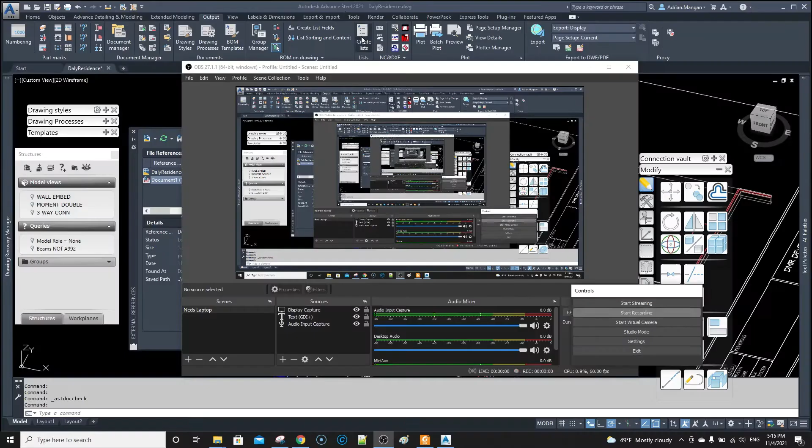So basically, this is a small model, and we're going to send it in. Before we sent the approvals in, they came back and have a couple of changes. So they don't want to regard it as a revision because it has not been submitted yet.

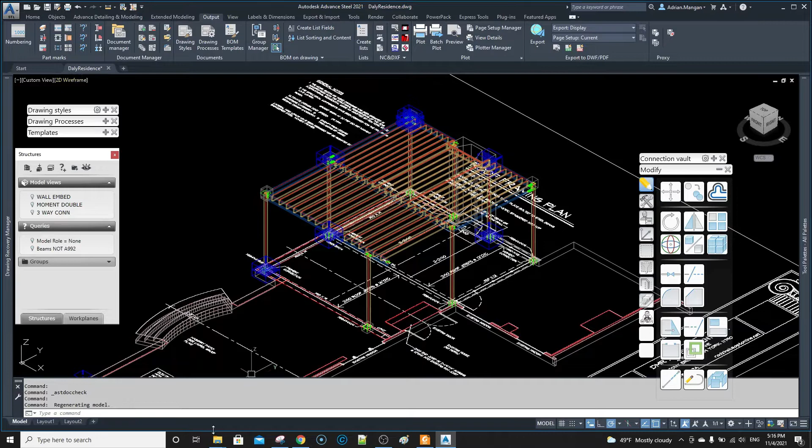But if you want, what I would do is come into the folder for the job, go into the details, select the three details and copy them, and then just do a new folder.

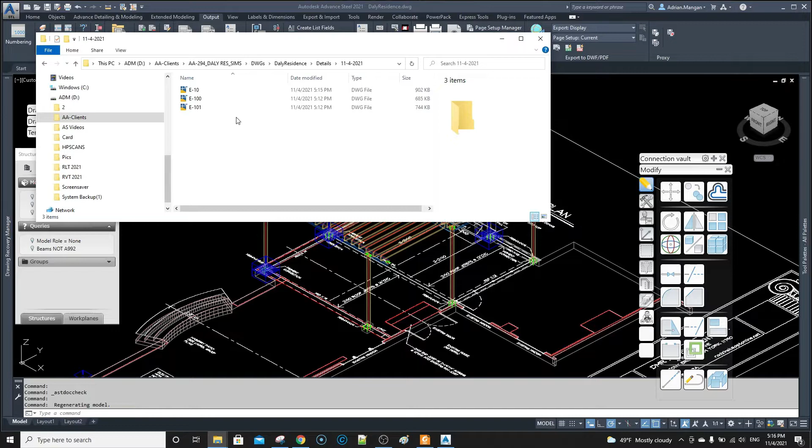Now if you're doing a revision, this will be different. So I'll do it both ways. I'll copy this in here, paste, okay. So now those are copied before I change them.

Now also you can go into the document manager. You need to make sure they're all up to date before you do the revision. You can see these three are all up to date, so select them all and...

Go to revision. Now I don't want to do this, but I'll just do it for this example. I'll just put column sizes.

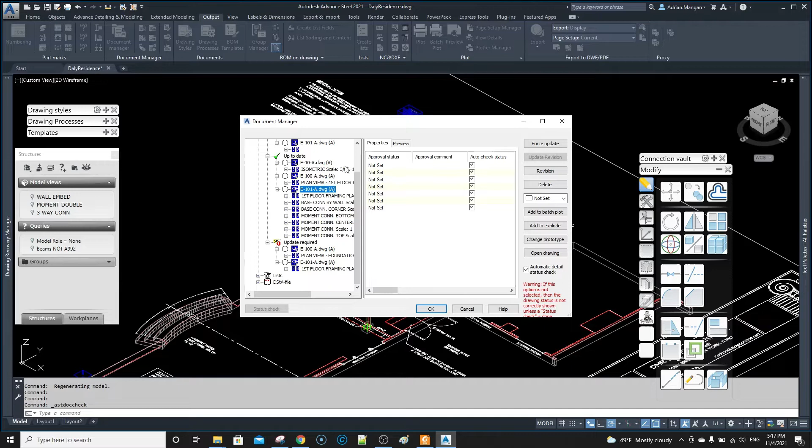One of the moments has to be moved. Okay. So it's adding a revision to these. So let's just do okay. Let's turn off the PDF.

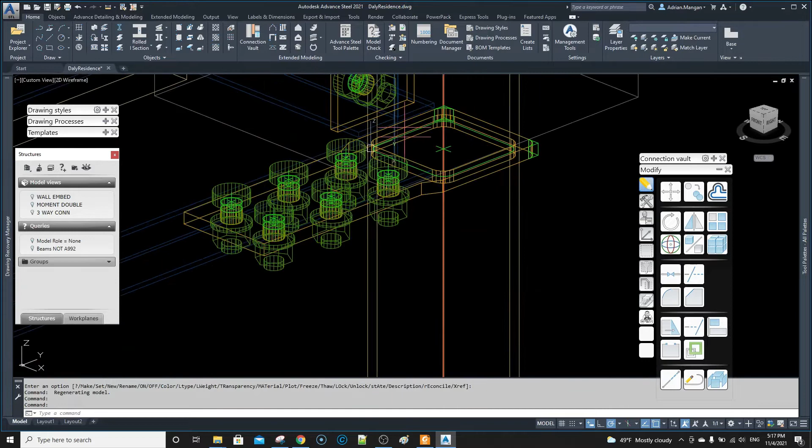So we have a couple of small changes here. For one, we want to rotate this moment connection heading towards this chimney over here. So you can select the bolts and the plates - that's all it is, the bolts and the plate - and we can rotate that.

So let's come in here and go to rotate. Select the rotate point on the center of the column, and we want to rotate that minus 90 degrees, I believe. So just check it first. Now we want to delete source objects, preview, and that's what we want.

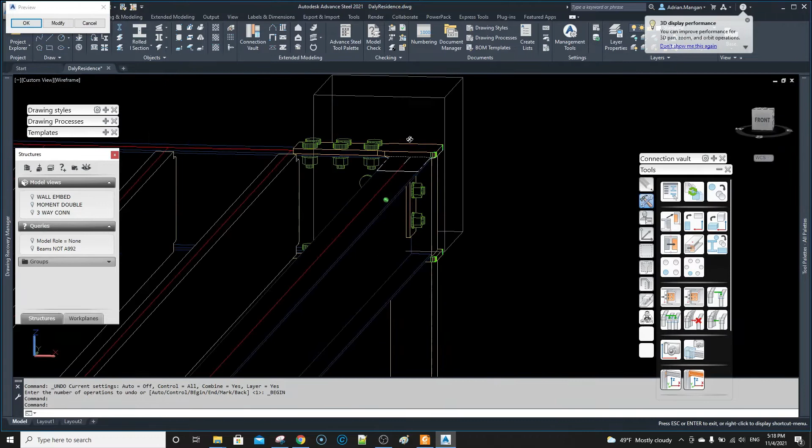Now we can see the bolts seem to be working. Just go back to modify, include additional connections, preview. Okay, there it is again. So now you can see the weld has moved also.

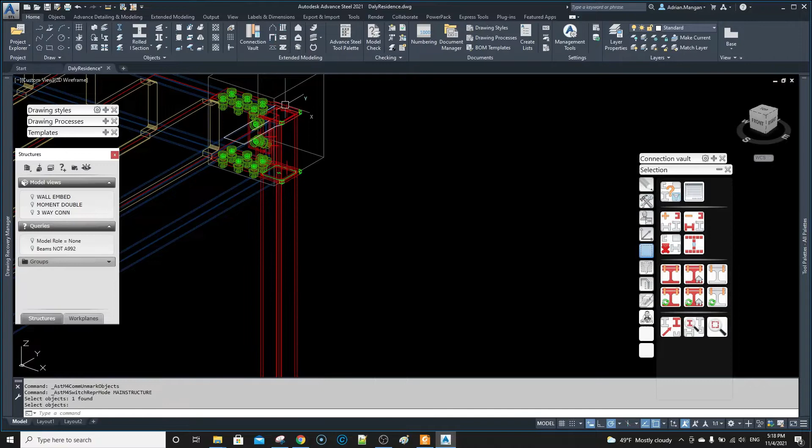So let's just check to see that it saved our welds. Alright, so everything is fine there. So that's one of the changes made.

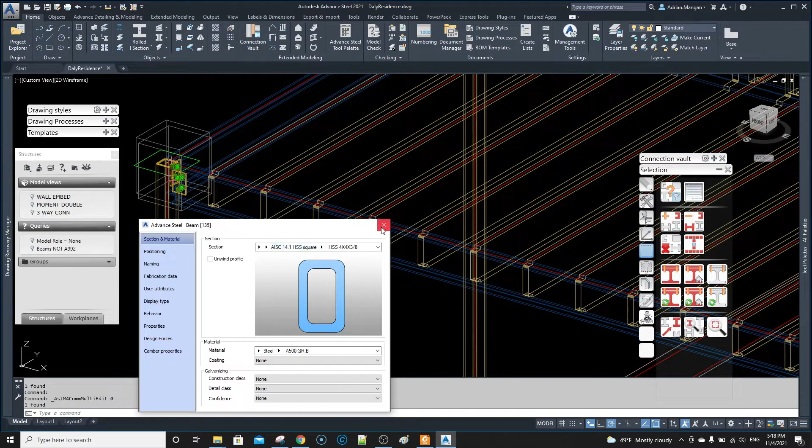Now the other change is this column here is going to change to a 5 by 5 by quarter inch. This one here is going to change to 4 by 4 by 3/8, which doesn't really affect us at all because it's just making the column thicker towards the inside.

So now we'll come over here and let's turn off the cameras so we can't see that camera in our way. Now we could create a model view here if we wanted to. That would probably make this a little easier, so why don't we create a quick model view, right?

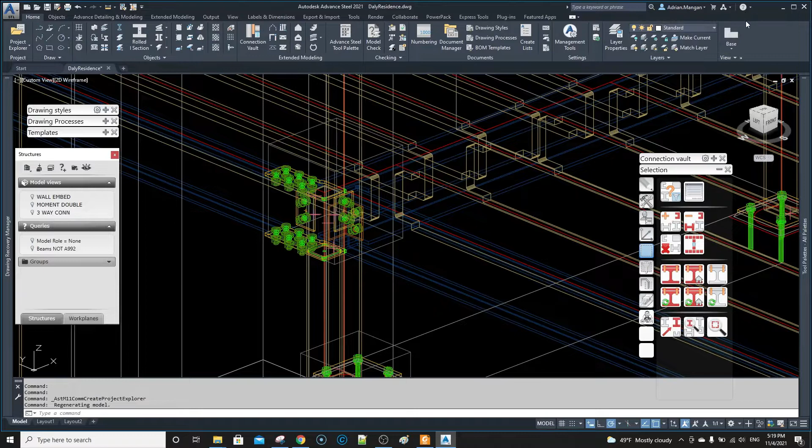So let's go in here, three-way. Actually, I have created these model views already. If I come in here and just put them on - I forgot, I put them on the cladding layer just so I can turn them off.

So let's click on this. So what we're going to want to do here is change this to a 5 by 5 column. You can see the plate is a 1/2 inch either side.

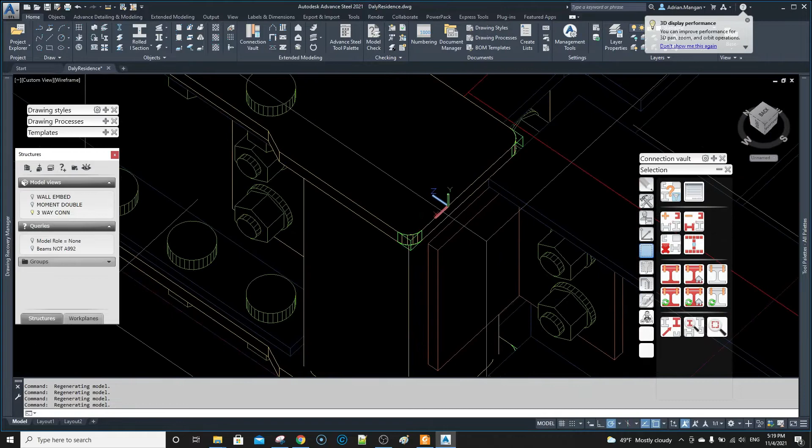So when I change this to 5 by 5 by quarter, okay, so that's good, but now I can see it's flush there.

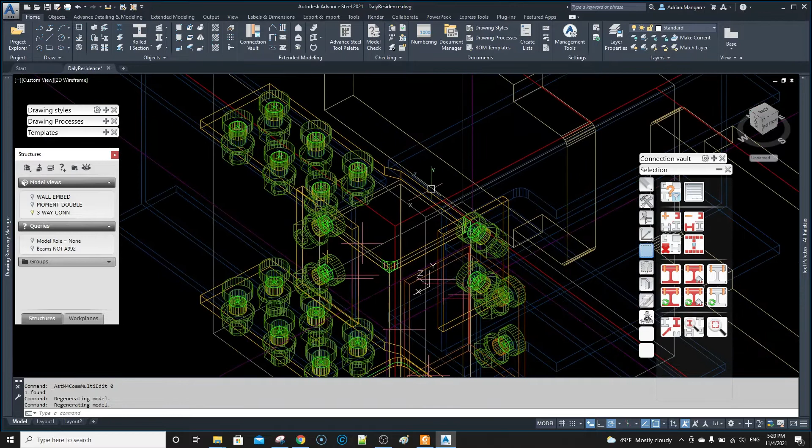So what I'm going to do is stretch this plate rather than redrawing it. So what I can do is let's make this box a little smaller. Sorry, you can only drag less than halfway. All right, you know what?

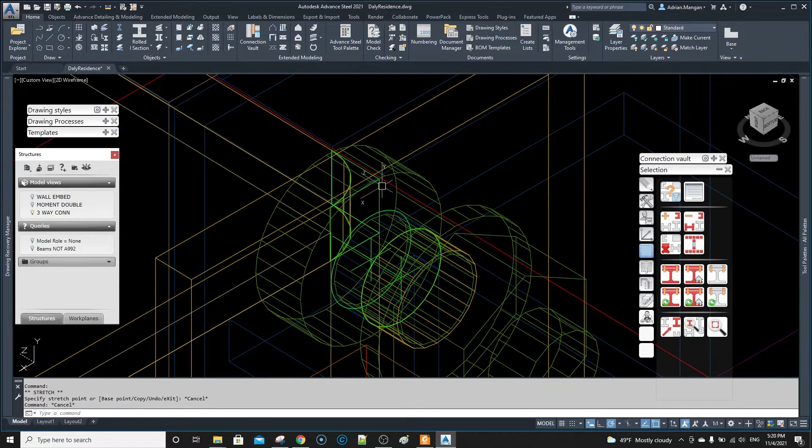That's fine. So now we're going to drag each way a quarter inch, or a half inch. But see, because we have a radius on the corner, it's messing it up on us. So just delete those radiuses. Okay, delete those, and now we're going to drag it - we're going to do a bit of dragging.

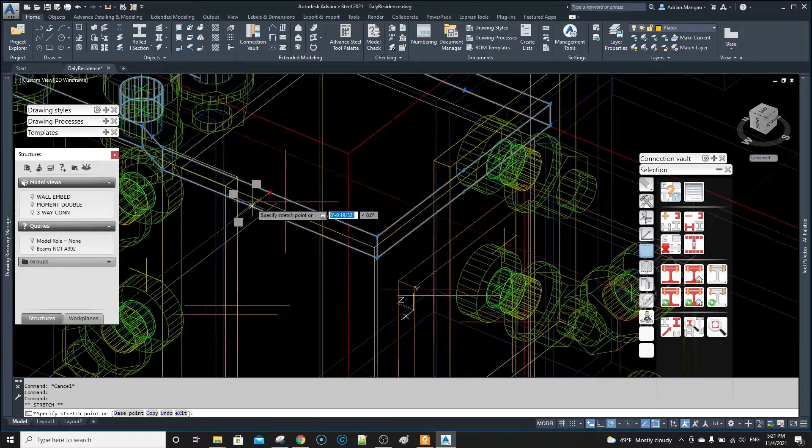So what we can do is do it for both of them, or copy it down. So let's decide. I'm going to go 0.5 that way, 0.5 this way, and 0.5 this way. So I have 0.5 inch over either side.

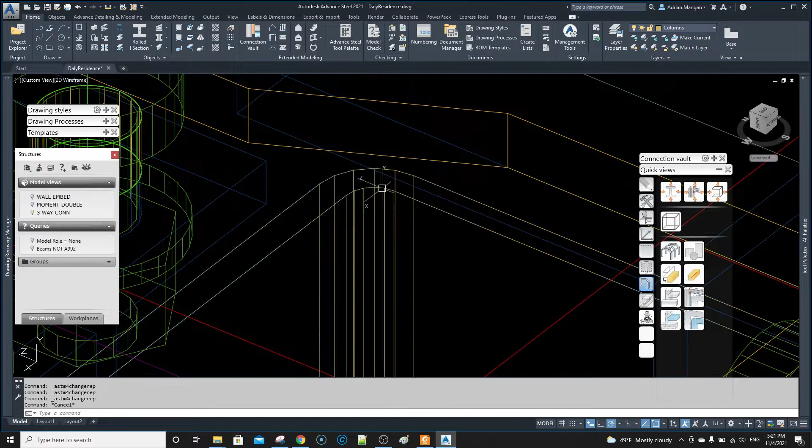You can see now this is close to this corner, but this is going to be rounded when it's viewed properly. So if we go and look at this, you can see we still have enough room for a weld there, but just to make it a little better, I'll go 0.5 back this way, and I'll also do the same over here.

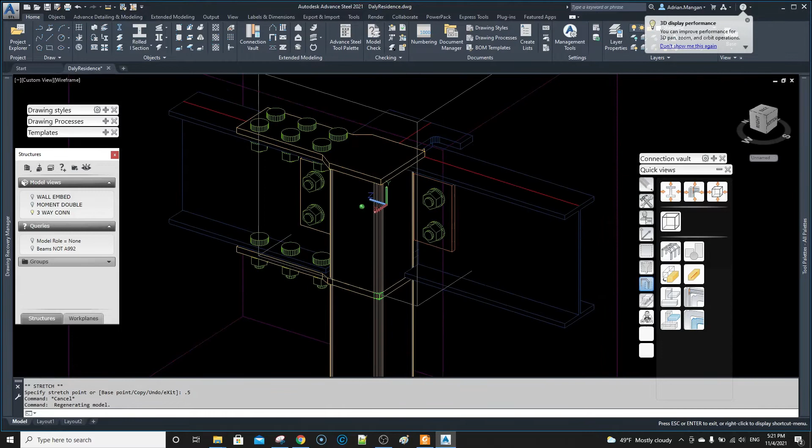Alright, so is that good? That looks good, right? So what I'll do is the same down here. We're going to delete these corners. We can delete this because this is off the old column, and we're going to do the same thing.

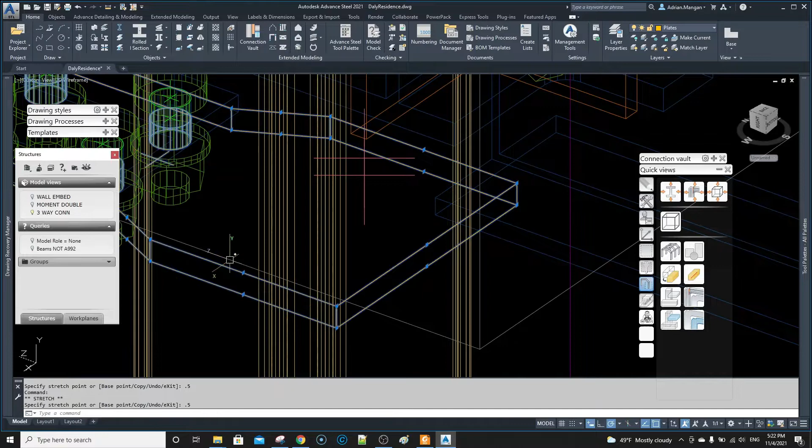So we're going to go 0.5, 0.5, 0.5, and then don't forget to stretch your corners out. 0.5 and 0.5. It seems a little monotonous, but it also means you don't have to redraw the plate, because it doesn't really matter the size. They're just going to cut it on the plasma anyway.

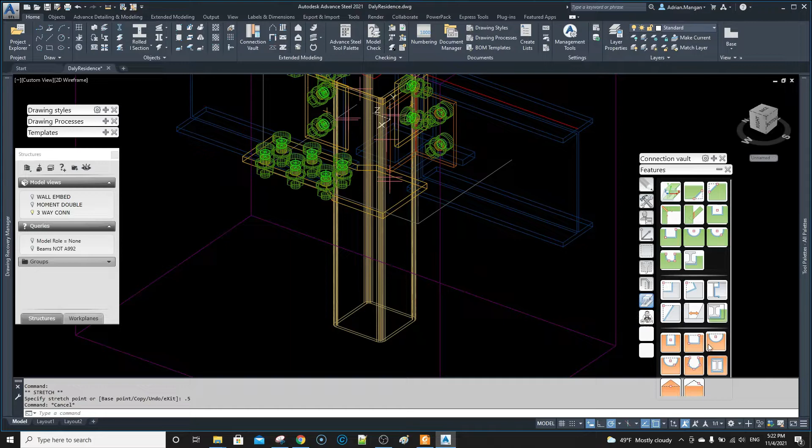So we're going to use this feature down here, and then select the plate. Now we're going to select the column, and we're going to add a 1/16 around so they don't have any issues fitting the plate. So there you go, there's your plate.

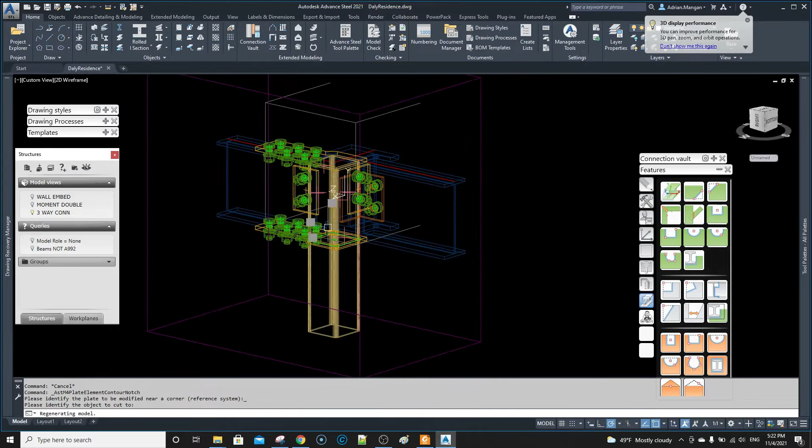All right, so because we haven't added any entities, we should have no issues with our 3D model the way I'd like to do it. So I'm going to move this over. This has got to go a half inch, but just to make sure, we'll move it in the Z direction to the face of this column. You can see that's how that's connected there. It's a little bit of a weird connection here, but it's fine.

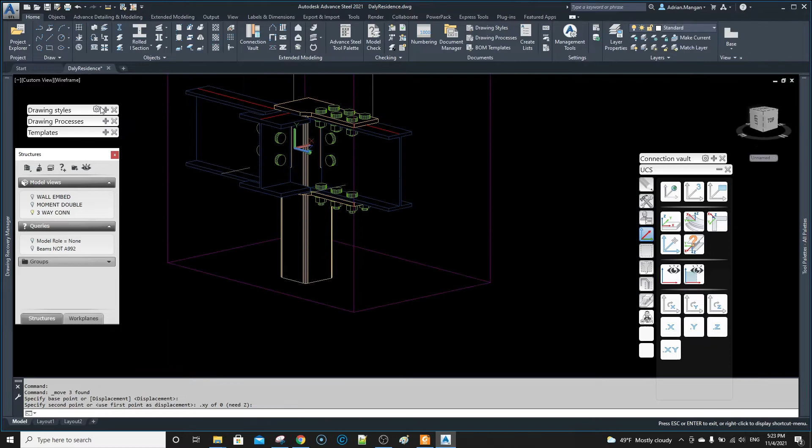All right, so now we have updated our model. Now we're going to go to Output, Document Manager. You can see I don't know why it's saying this is up to date, because this one is not up to date—I certainly have changed some stuff, but sometimes it shows up as up to date and update required. So let's open all these.

I don't like to just update them all at once. I mean, you certainly could. I like to go in and update them one at a time so I can see the changes as they're happening. Everybody's different—it probably takes me longer, I'm sure, to do it this way.

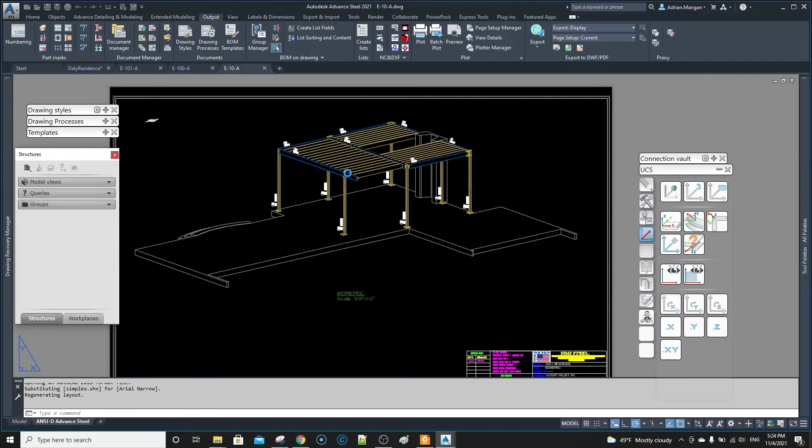So let's have a quick look. We can see this column here. You can see I have an unresolved issue here, which I need to purge from this document. You can see this is 4x4 by quarter, 4x4 by quarter. This I changed up a size, and this one got a little thicker, and this moment connection rotated.

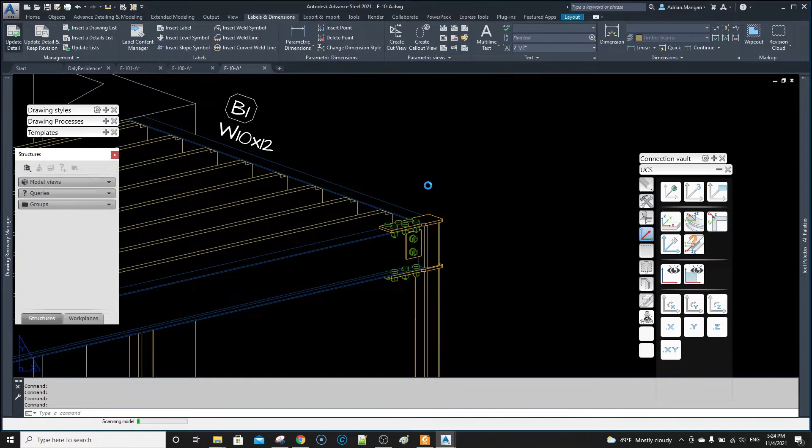So what we're going to do is select this, labels and dimension, update detail, and we'll see this flip across here. Now, if I had drawn a new one and deleted this one, this wouldn't have turned around—it would have just deleted this one, and the other one would not have shown up because of the way I created it.

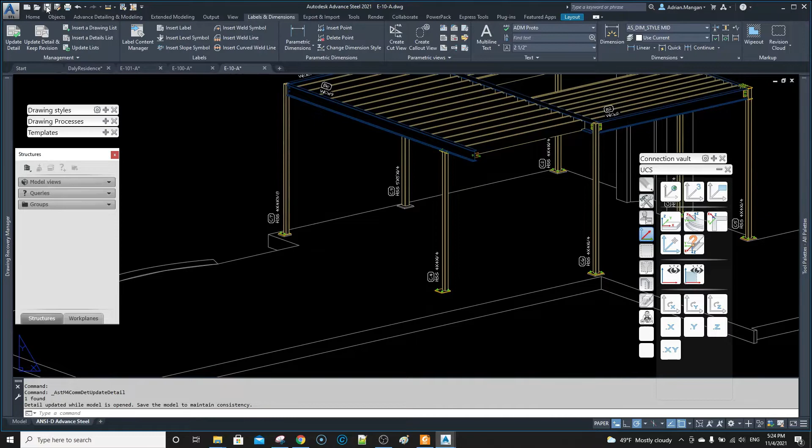We'll come over here. We can see this is a 5x5 by quarter, and this is a 4x4 by 3/8. So that's good. So if I go back to the model and go to Document Manager, let's have a look and see what's up to date. We can see this is now up to date—no update required, so that's good.

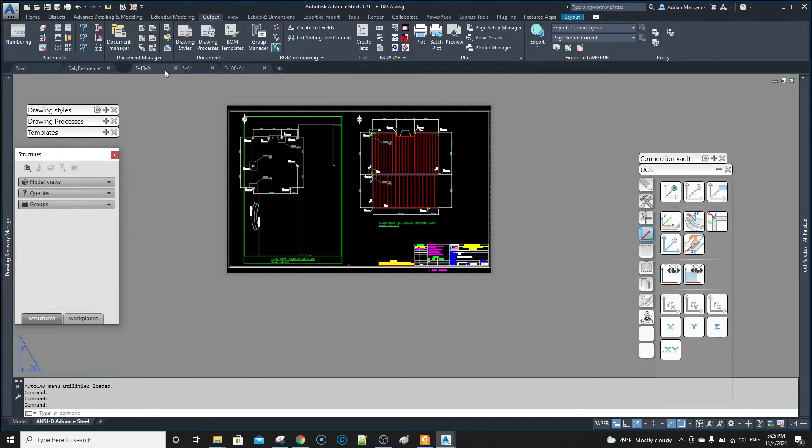So now we're going to go to the next one, which is the plan views. Let's see, we're going to go here and select this, update detail. All right, and we can see that this one has changed to 5 by 5 by quarter, and this is 4 by 4 by 3/8, so that's updated.

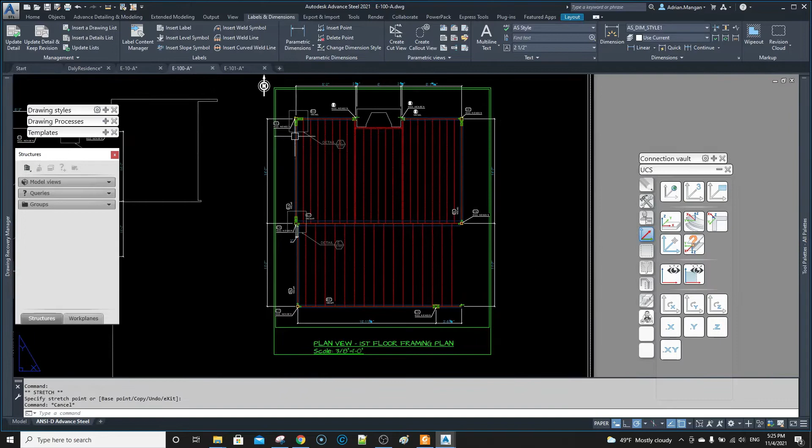And we're going to come over here and we'll watch this one update. We can see over here the column sizes are still incorrect. So when I go now, you can update these with revisions and it will cloud these for you. So I guess I could do it, but I don't want to because I'll just have to remove the clouds anyway.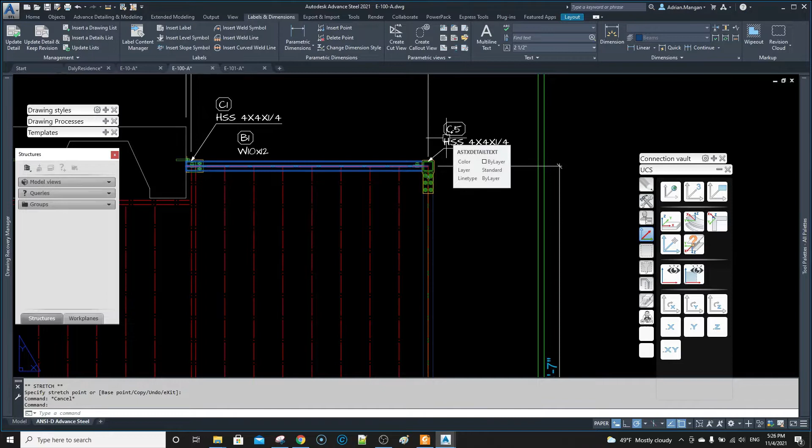I guess we could do it, for example. Let's see—no, I'll just do it this way for now. If you go back into the document manager and update with revision, it'll mark all the parts that have changed. So you know what, we'll try it. I don't use it that often, to be honest, because they don't really require me to mark them all the time.

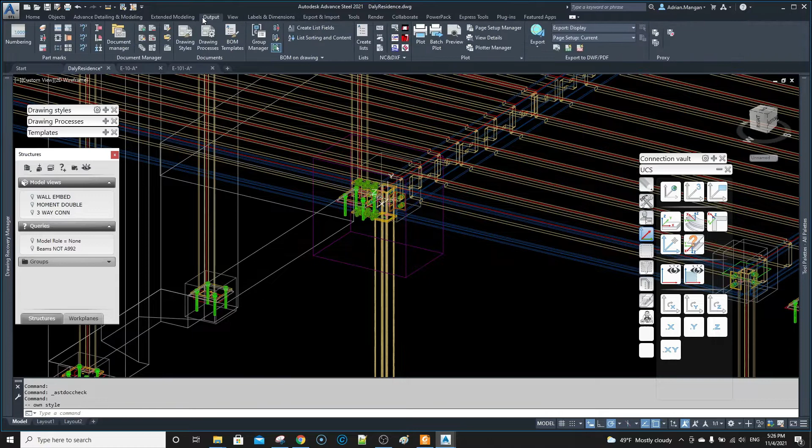So if we go to Output, Document Manager, now it's this one, revision. See, it's already got a revision, so you'd kind of have to add another revision. The way I revised them the first time, I should have done it at this stage, but I wasn't planning to do it this way. So what we'll do is just add another one anyway—it doesn't really matter, so I'll just put in changes.

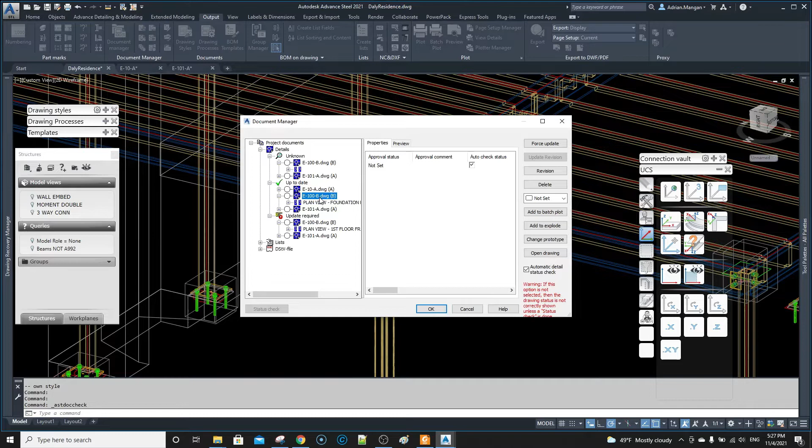Trying to think if I did that right, did I? No, I didn't do it right, so that didn't update on that revision. I have some settings I need to change, so let's not worry about that for now. I wasn't planning to go into that anyway, I'll do that in a different video.

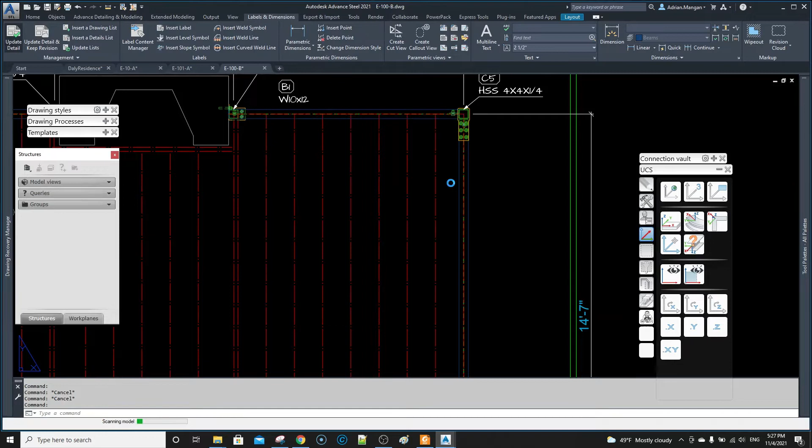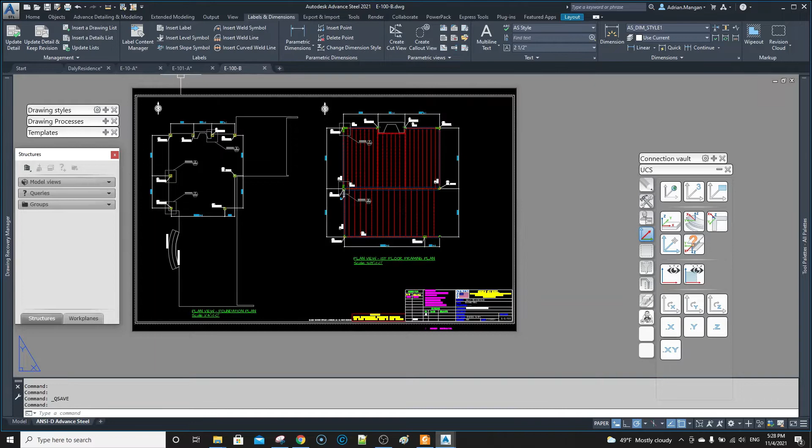So I'll just update that, and you can see that has changed around, and over here the size is now the right size, and this one now has the right size also. So that's good. If we go back, you can see now the revision has changed to B, but my marks have not come in because I don't have it set properly, because I don't use that. So for now, we'll just move on with it.

Let's go to this last one, so this is the corner one. This actually has changed, so what we'll do is select this, update. You can see this size will change to 3/8. Column got a little thicker. We'll come to this one.

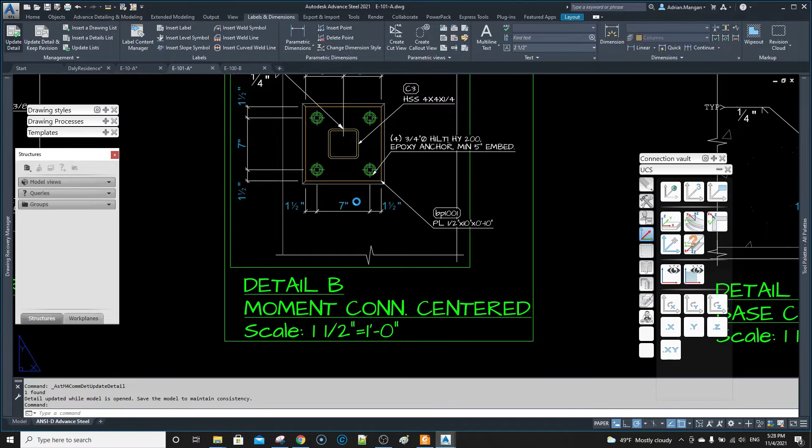This is actually the one that got bigger. I didn't change the plate because they'll still have room to drill the holes. So output, sorry, update detail, labels and dimensions. Okay, you can see that got bigger.

Now actually I do have to change it, because you can see my grout is no good. So what I'll do for now is delete that grout and let's draw in a rectangle here.

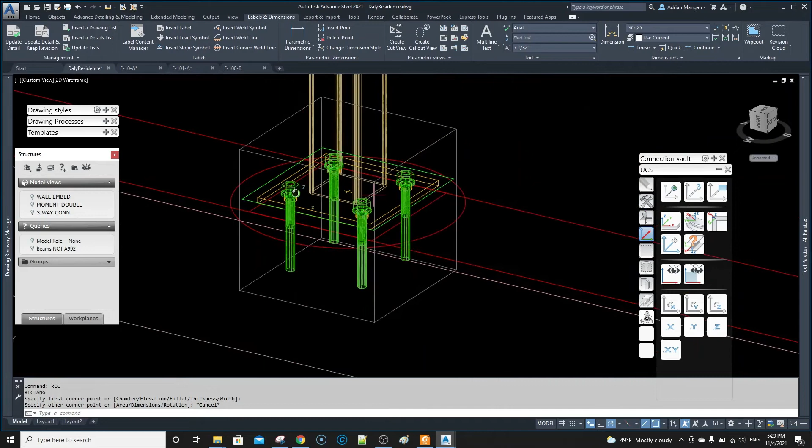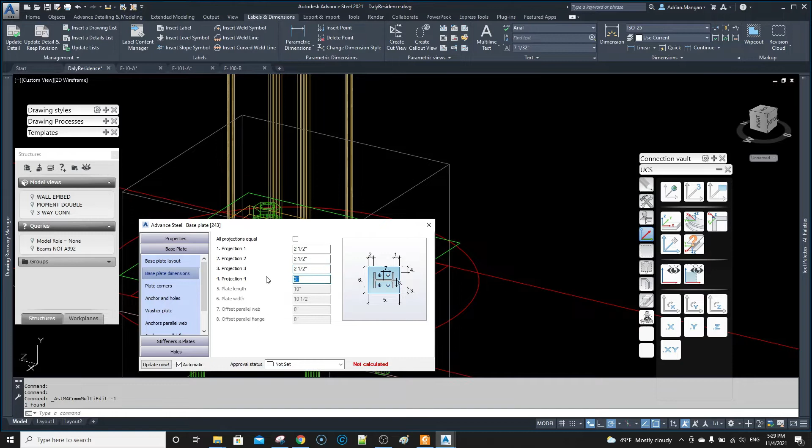I didn't really want that plate to be that much bigger, so let's advance the joint. I'm going to make this plate a little smaller. I didn't realize I had it 3 inches around, so I have it by projection, so 2.5, 2.5, and so on. Obviously you can do this a different way, or not change all 4, but for now, this way.

Alright, and now it fits still, that'll do for now. So we just need to keep in mind that that is going to affect those other two drawings again, so we need to come back here. You can see this plate has disappeared. Now this happens sometimes, you lose this plate, right?

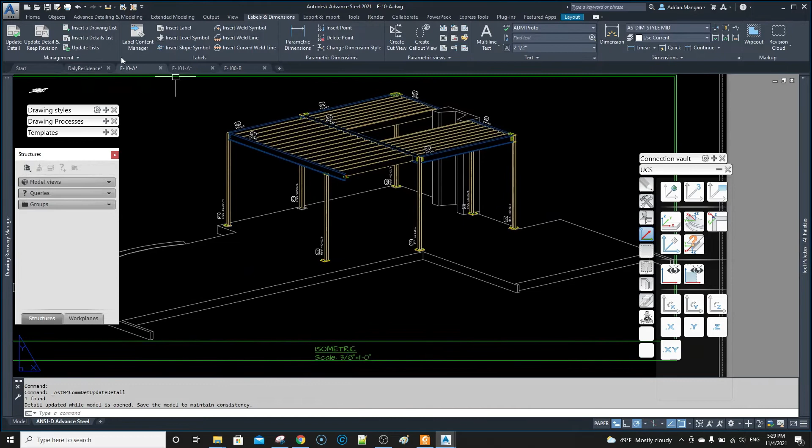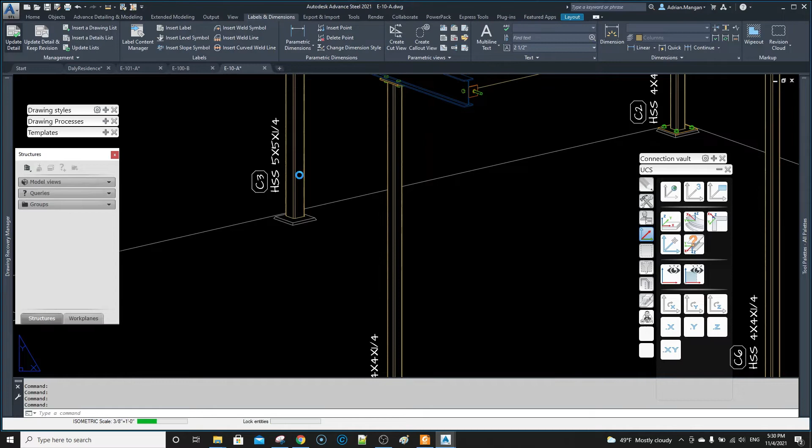So we've lost this plate, so let's close this down, and let's go to output, document manager. Sorry, go back to the model, document manager. It says that's up to date, because I updated it, but we still can't see the plate. So let's come back in, it should come in after you close it and reopen it. Nope. So that usually works, so that obviously is a problem.

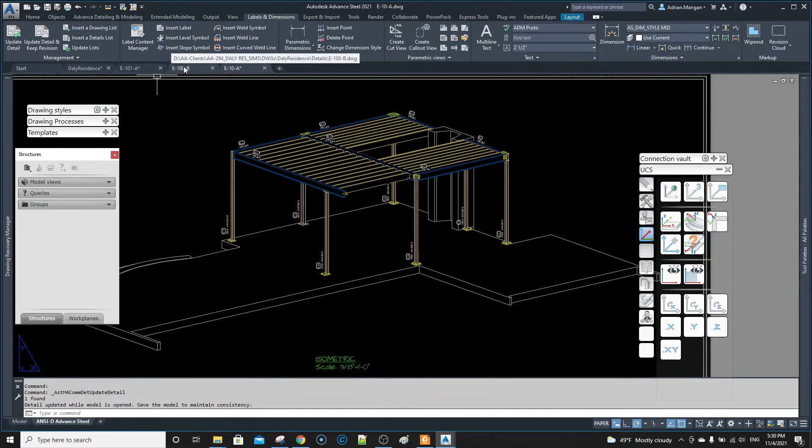It's weird, I had problems with this before where they weren't coming in, and then they were coming in once I closed it and reopened it. So that's not working, so I'll probably have to recreate that view. All right, we'll go back to where we were here.

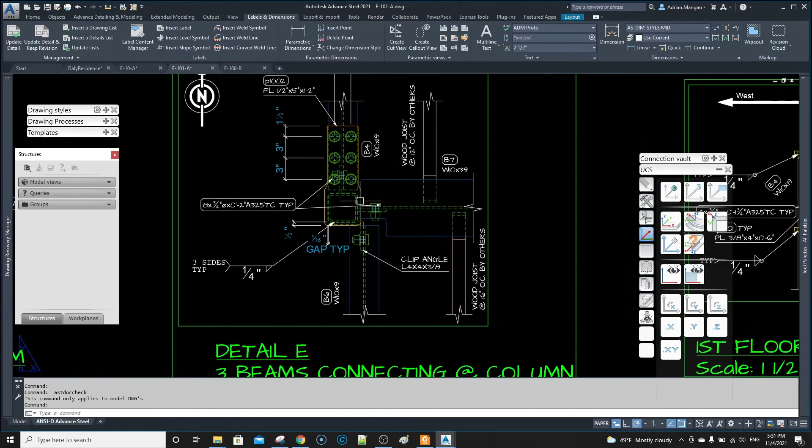These are okay, this one is not affected. This one is not affected. This one, this one is affected. This was the one where this column got bigger. So let's see.

Update detail, there you go, you see the plate got bigger. We have enough room to weld, so that's fine. And that's the name of that beam. All right, so...

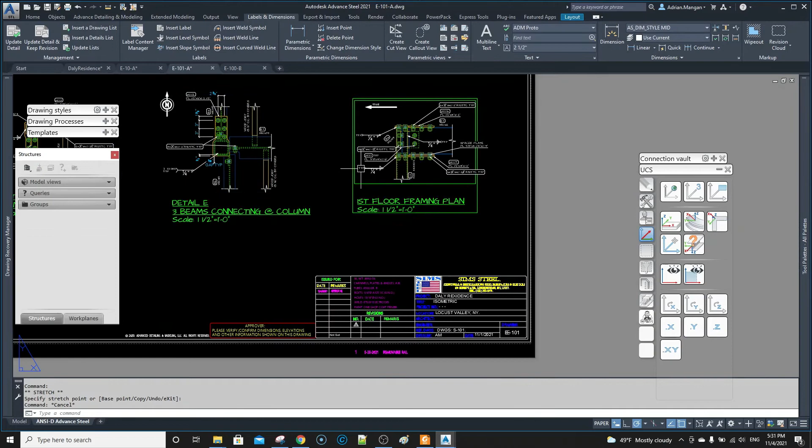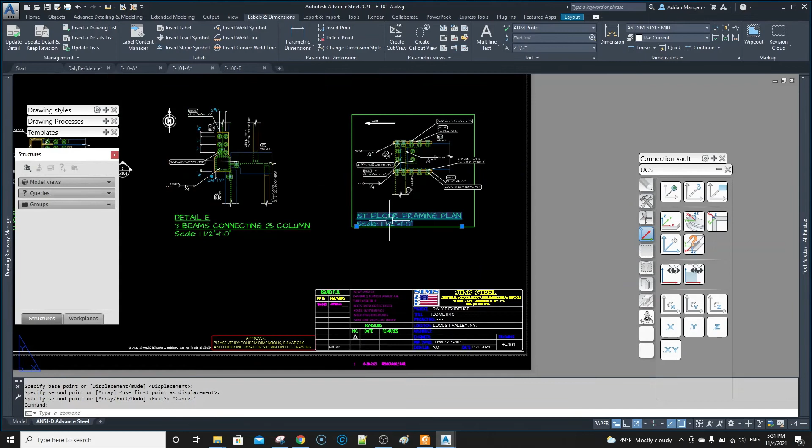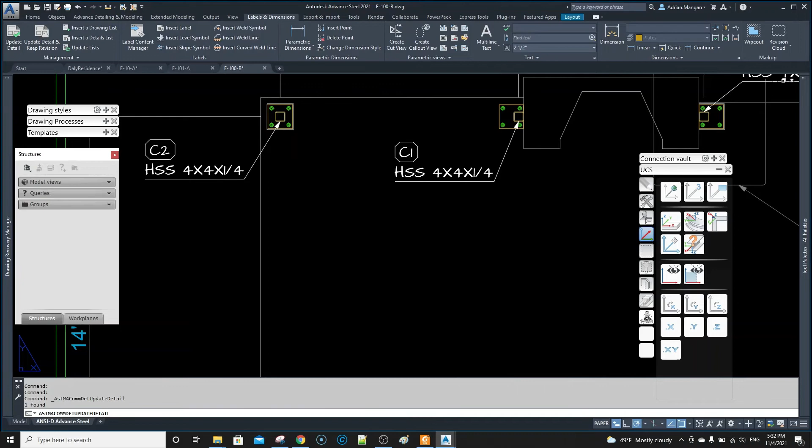So alright, so that should be good. Let's update this one. I should have went down and showed you it updating. So let's change this plate. We can see the grout, so that has worked. So that one is working and it's not disappearing.

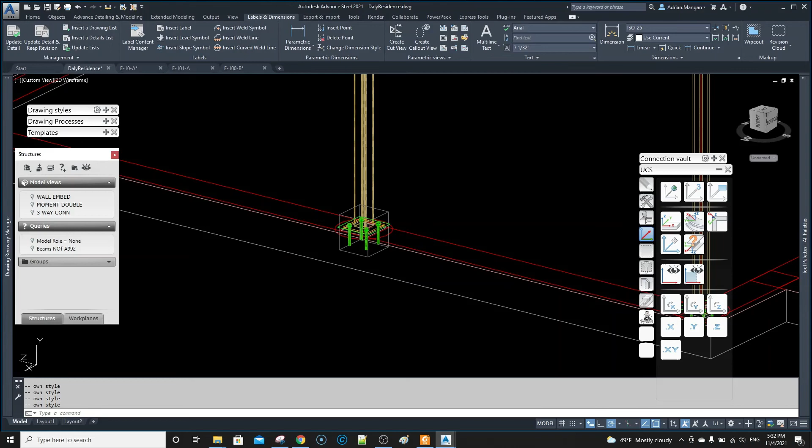This one, because I changed the size of the plate, doesn't want to show it in this 3D view. So it means you would have to create it again. I don't know if I've stored that direction, I have not stored that direction. So basically you just have to bring it around again to where you want it to be. This is how I do it anyway, and then just create another 3D view.

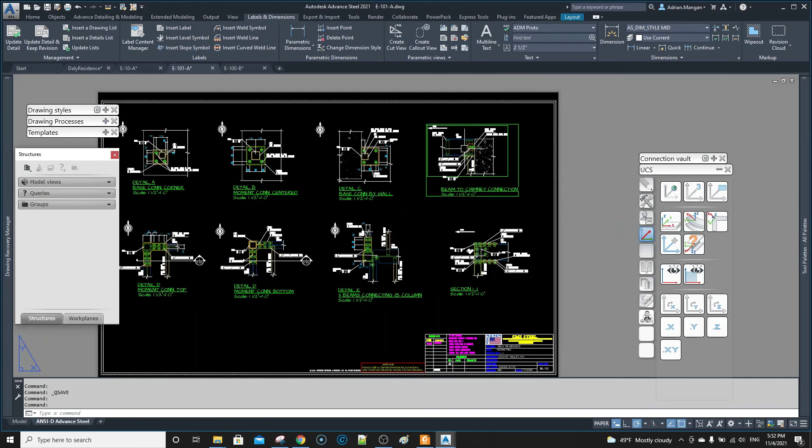But that's it, so now you're drawing. The one thing is you can just update all these through the document manager if you want, but I like to see the changes happening while I'm looking at them. So everyone to their own, but also just wanted to show you the modeling changes.

So how long, I mean that didn't take that long. There weren't many changes, but they're updated now. And title blocks and all that, you'll have to update those with the revisions. So hope that helps, okay.